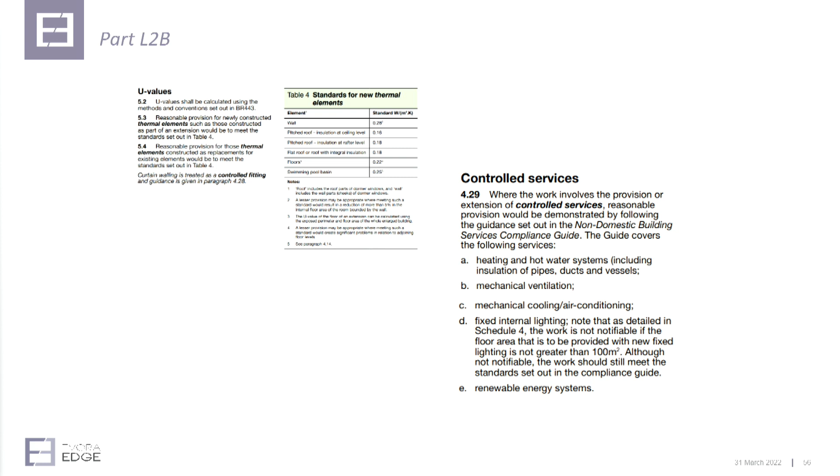So if we're going to change the heating system from a traditional boiler radiator system to an air conditioning heat pump type system, we've got things we've got to comply with in building regulations and demonstrate that we are complying with those. So actually within the commercial sector, I believe the regulation is tighter.

New building development, yes, is regulated, but retrofit on existing properties, you can do what you like in your house. Nobody's really going to come and knock on your door and tell you you've contravened an energy regulation. But in a commercial building, we've got real responsibility to make sure we're installing with energy in mind.

So whilst the dilapidation - our landlord's now got his vacant floor that he's going to do something with. But of course he's got the rest of the building and the rest of the tenants to consider. And if he's going to do something on that floor, he enters into an obligation to start looking at other things.

So it introduces a number of challenges for him, which we have to consider as consultants. How do we interact with the rest of the building infrastructure? Typically it's electrics and fire alarms that come up as the challenging things.

But existing ductwork typically has a life expectancy of 30, 40 years, but you can see ductwork that's been in buildings for a lot longer than that. And the cleanliness of the inside of ductwork - all of a sudden the world's changed, and good quality fresh air is something we all want now. Perhaps it wasn't that high on the agenda a couple of years ago.

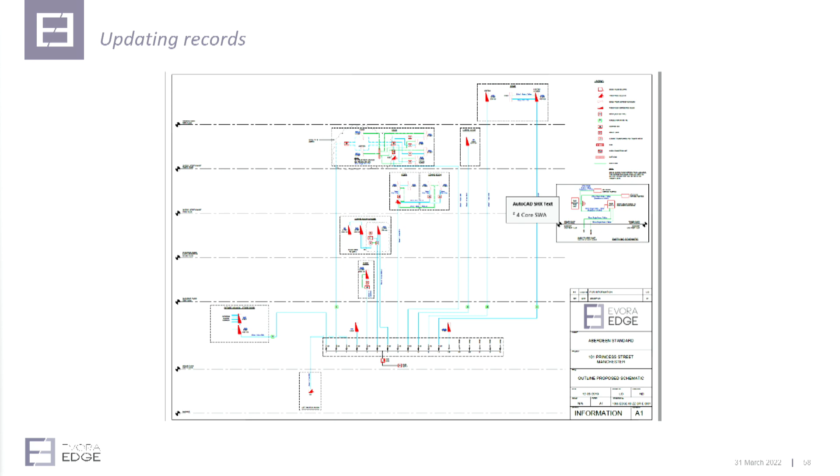So we update the records and all that is part of creating this digital model of the building. We've got the digital twin of the building, but we're creating all the digital information that sits alongside that - the asset register, wiring diagrams, floor plans, details of risers, etc.

So what's driving us along the path to net zero is the MEES regulation, the Minimum Energy Efficiency Standard regulation, and it places obligations on landlords. 1st of April 2023 is interesting - if a non-domestic property is already let, landlords must not continue letting it if it has an EPC rating of F or G, must not continue letting it.

So this is a bit of a step change. You've got your tenant in there already, but the building is rated F and G. You've got to do something about it before 2023. That's an interesting angle, because most of the rest of the regulation is around the point at which you're letting or selling the property, but this is a change. It's actually starting now to impact on buildings that are already let or already got a tenant in there.

So that's a risk. I know of a few buildings that are F rated, but I don't think our portfolio's got very many that we need to worry about being at that level, and we're certainly doing something about them if they're down at that level.

Sorry, just to clarify that statement - what you're saying is in exactly a year's time tomorrow, if you've got a commercial property and it's a D, you've got to say to your tenant... No, an F or a G. Oh sorry, an F or a G. So if it was an F and you've got a tenant in there at the moment, as of a year's time tomorrow, they can't rent that building. They've got to put into place a plan to bring that EPC rating up.

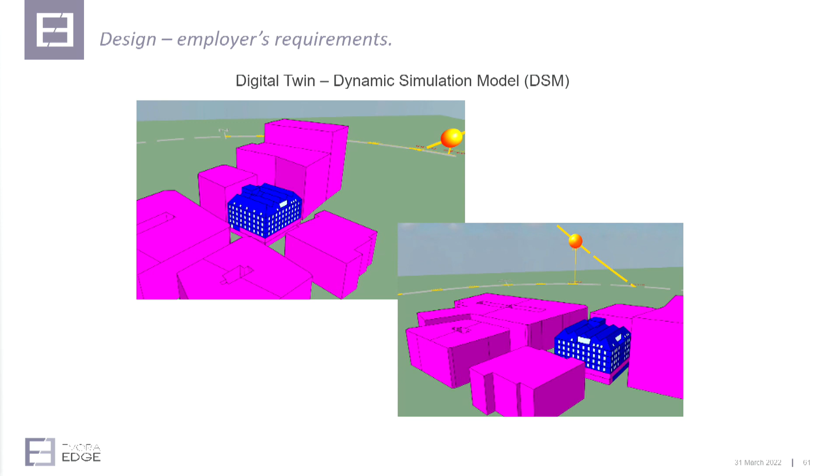So, digital twins - the other reason for creating a dynamic simulation model, this is our building in Manchester that we're talking about, is that in the simplified modelling methodology of a level 3 and a level 4, we can't put the buildings around that building, so we can't consider the shading factor.

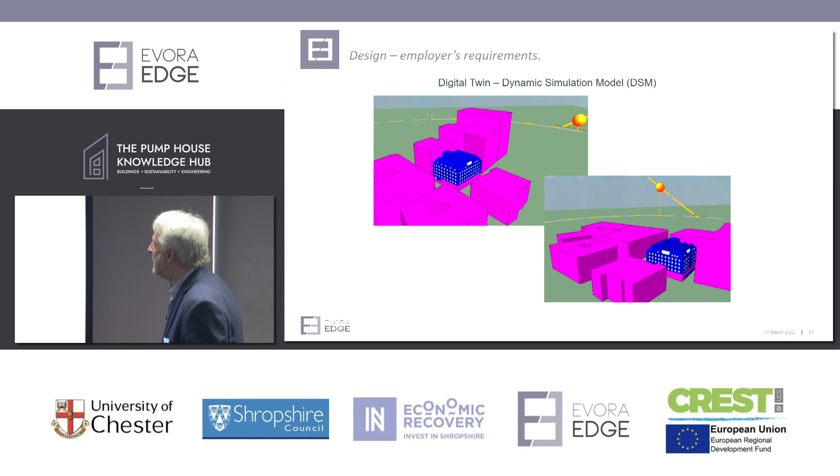So with the dynamic simulation, we create a dynamic simulation model. We can do solar prediction, we can model solar panels on the roof, we can model heat pumps in the building, all kinds of things within that model. We create that digital model, but that's not an easy task to do - it takes us a while and costs a pretty penny.

A pretty penny? Give us a flavour. For something like this building, you'd be paying between £5,000 and £10,000. But there's nothing on this side of it, so surely there's got to be a discount? Oh, shading-wise, yeah, putting the shadings on is easy - those pink buildings go up very quickly. It's the detail of creating this that takes the time.

Does it go to the level of PHPP, insofar as Passive House takes in the trees and the types of trees? We don't go that far - we would put trees in, but we don't go into that level of detail. So that makes a massive difference? Of course it does. Yeah, of course it does.

So on MEES risk - we've come to the conclusion that we're going to take out the gas boilers in this building and put in heat pumps. The type of heat pumps we put into these buildings are variable refrigerant volume, variable refrigerant flow heat pumps.

So they're different to the type of heat pumps going into domestic properties. A domestic property heat pump is air to water - you're using the air to heat the water. A VRF system is typically air to air, but it uses refrigerant gas to move heat around the building, as opposed to water.

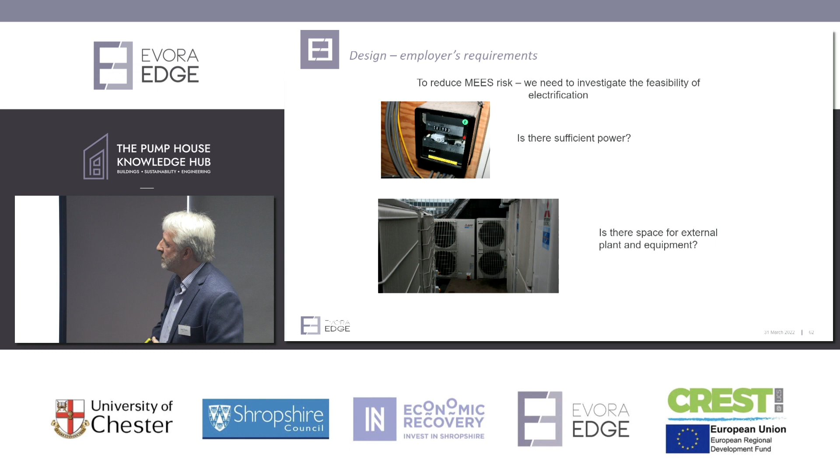That building we looked at is actually a listed building in terms of its facade. The roof was changed and it's a pitched roof. In our original design, working with the fabric consultants and architects, we designed a platform for that roof to house all the condensing units for the future, but it fell down at planning. So we're left with the challenge of where to put our condensing units, because we can't put them on the roof. This picture is a real picture from that building that we were able to rectify.

The tenant that vacated the floor had actually installed all this air conditioning. You can see they're on £30 rubber feet - it's actually plastic, not the big foot that we specify and use. And you're right, vibration becomes more of a factor in this. But they'd packed it so tightly, and this is part of our consultancy - it didn't happen before we got involved, but it's part of our consultancy now.

We would approve any works that the tenant's going to do. But what happened before we got to site was the tenant pitched up and installed their air conditioning units, and these two units were serving somebody else's floor. They'd created so much heat in this area that those two air conditioning units keep tripping out, so that tenant's got a problem. But the new tenants, I'm happy, I'm working, I've got what I want.

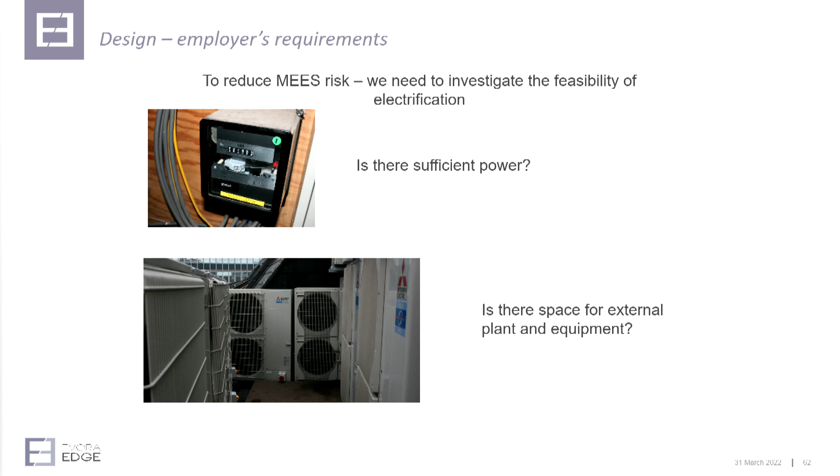So our management of that - what we've been able to do is strip all this back and create a space to put in new air conditioning units. But all that's a factor in how we're looking at managing the building.

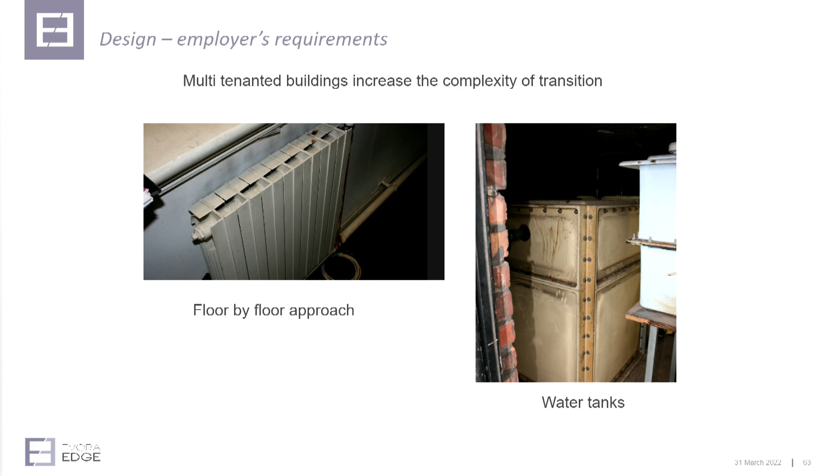So multi-tenancy buildings increase the complexity of transition. This building has got gas-fired boilers and radiators, but we're going to convert one floor to VRF. In fact, the phased approach means we're doing 3 of the floors, and the other 2 are already there. That phased approach means we want to get rid of gas now, so we'll remove it from this floor with these radiators and put VRF in. But that's only a marginal benefit to the energy performance certificate, because other floors are still on gas. So how quickly can we transition the rest of the floors?

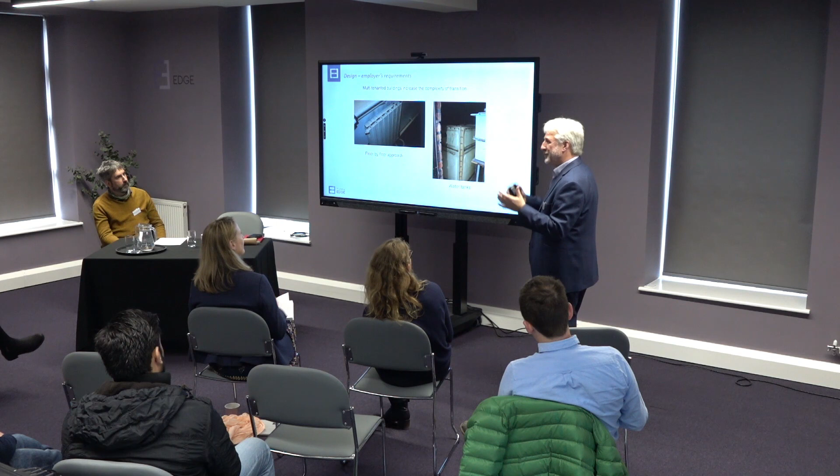We have to look at lease breaks when a tenant's going to come out. Is that a phased plan, or can we do that work whilst tenants are in place? That's a negotiation, and one of the upsides of COVID is everybody now realises they can work from home. There's much more willingness to say to a tenant, if you go out and work from home for 6 weeks, we'll come in, bang bang bang, and then you come back and it's all done. Whereas before, if you put that as a challenge, they'd say no way can we work from home.

Other things - this building, the roof works etc., the water tanks are there, but they're not coming out anytime soon because there's no physical way of getting them out. They're sectional, they will break down, but it gives us real challenges around the transition of the building over time and how things get adapted without any consideration of how they can be maintained and moved along.

So we write what we call employers' requirements, they're specifications, and this details everything that needs to be done on that project. So we're now at the stage where we're specifying what we want. In our world, we pass the ultimate design responsibility to the contractor. So we're giving them guidance on what we want, but it's up to the contractor. They become design and build, and it's their responsibility to take that on.

And there are good reasons for that sat as a consultant, but there are also good reasons for that sat as a contractor as well, and I've worn both hats. So, but we specify things.

So we specify in detail what the lighting scheme is going to be, because that's important to the EPC rating. That's the margins we're going down to now. We're not just saying LED lighting, we're talking about the harmonic distortion, the uniformity, the lux levels in detail, because that's in our model, and that's what we're telling our client. Spend £100,000 on lighting, we're going to move your EPC from here to here. And if we spend £100,000 on lighting and we don't move the EPC from here to here, then we're embarrassed about that. So we're very specific in detail on those sort of things, and regulations and standards.

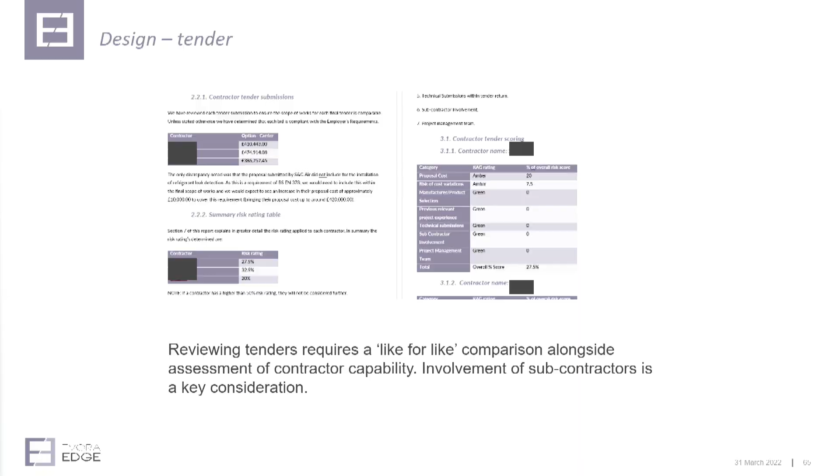On the projects that we deal with, you can see the sort of figures. That's a £400,000 to £500,000 contract. On those sort of figures, there are always going to be a drift on cost of some sort, so we put a provision in. We put a 5 to 10% provision on top of that figure for things that we'll find, because one of the things you have to do on this sort of work is validations beforehand. So there are the unknowns. We've had a look at the electric in the building, but until we start to take ceilings down and stuff, we don't know. So there are unknowns, so variations are going to come into play that will potentially lift the cost of that project.

And of course there is value engineering as well, and the negotiation about value engineering. So as I say, we produce a design intent, an employer's requirement, but a contractor may come along and say, actually we've looked at this, we've got above the ceiling here, we could do this differently. We could put this distribution board in a different place. We could put the air conditioning plant not where you're saying, we could put it over here, and that would save us on pipe work and this, that and the other, and we could bring X amount of savings into the project.

Normally they don't tell us that, they just save it and put it in their back pocket, but when they're looking for the order, the value engineering comes into play, and that's where the benefit is to them of taking design and build, because they can harvest some savings themselves, and we're happy for them to take responsibility of making that change.

So like for like, it's a number of issues, not just price driven. We quite often go to our client and say we've got 3 prices, but this one is higher, yet it's the right price for the job. Because we also benchmark, so we know pounds per square metre how much stuff's going to cost, and we know very quickly if we're out of that sector.

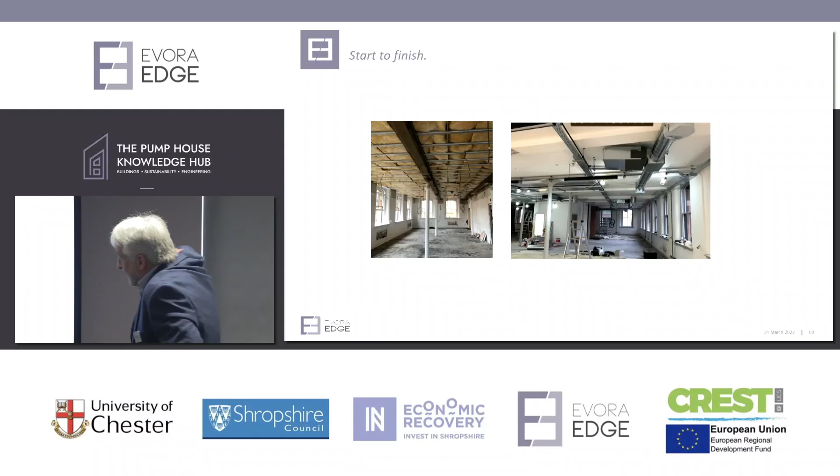So we've done the project, start to finish on this building - radiators out, ceiling out. I'm not 100% sure, because we don't deal with fabric, whether that's insulation going in or coming out, but it is a factor, and this is an interesting discussion we were having.

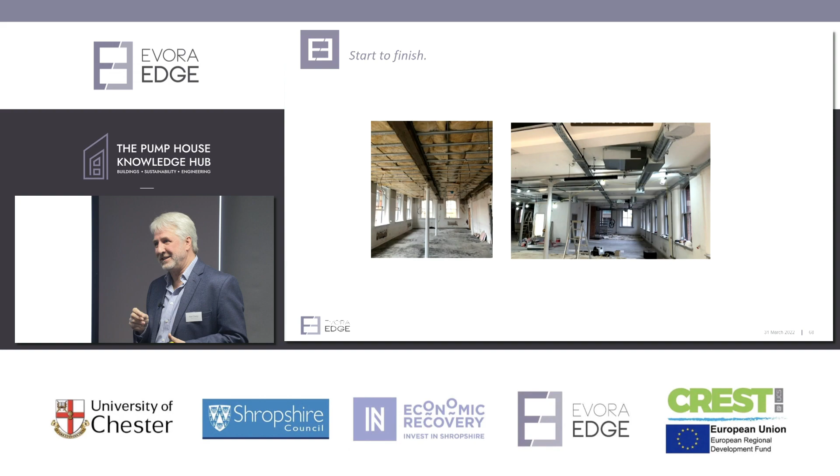Who with? I don't know who with.

On heat metering, billing and networking - if a tenant comes in and insulates that floor, the tenant above is going to get an increased heating bill, because we've now stopped passing heat to him. One of the things regulations on heat metering network billing is introducing is the requirement to bill tenants on their heat as they use it. Traditionally we've got separate metering in this building, so we get our own bills for what we consume, but in a large building it's done on a pounds per square metre basis - everything's lumped together and you pay on a proportional basis against what you've used. But the regulation coming into play now is demanding that every demise space is separately metered and heated.

So a tenant, as I say, may get a shock if there's a fit out done and all of a sudden the floor's insulated and his bill's going up.

We're installing here exposed fan coil units with ducted distribution, all the rage. This is an old print works, so it actually fits the environment. Not my favourite thing as an engineer, because I don't like to see ductwork and cable tray and stuff, but other people do, all well and good.

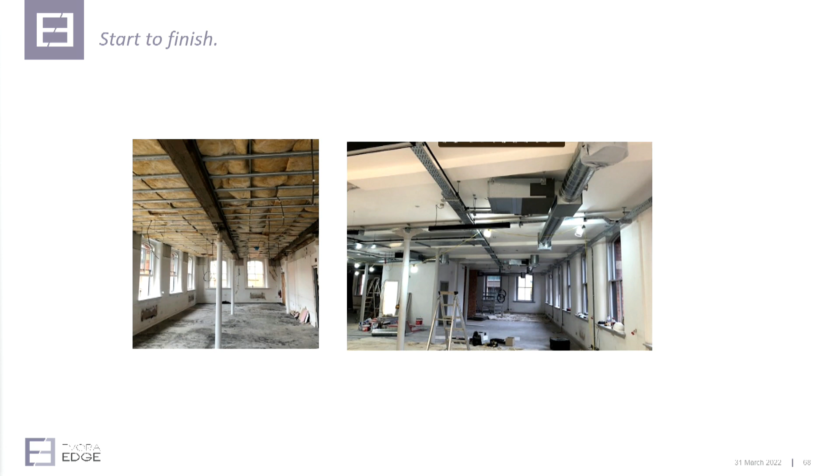So we move the project along, and we go along and check that the work's being carried out to the requirements and specification, and we get to this stage. This is a Cat A plus that I mentioned. The landlord has gone one stage further than just fitting out and getting ready for tenant. He's fitted out with all the fixtures and fittings in there, so it's turnkey. We've put the

Data and fibre into the building as well, so everything's there. You can come and plug and play. Come and sit at your desk tomorrow and start working.

And that's an attractive proposition. I suppose we've been in a recession, a COVID-induced recession, and a lot of companies went out of business. There are a lot of people starting up fresh, and those people don't necessarily want to commit to a 5-year lease, but they do want office space, and they want it ready. So they'd rather pay an extra £1 per metre squared for instant space than getting it and having to fit it out themselves, and be ready to go. It's flexibility - they can move in and out of that space.

What we're also creating now in office spaces, as you can see here, is these collaboration areas, pretty much like we've got here, because I think the office market is changing. People will come into offices to work, but they won't be coming in to sit at a desk. Obviously there are some jobs that will require people to sit at desks, call centres etc.

But most people will come into an office to meet with other people and collaborate. But if they want to write a report, do something, I think people will sit at home and do that now. I think there's a change in the way people work, and it's actually the reality of the way that people at director level have embraced that flexibility.

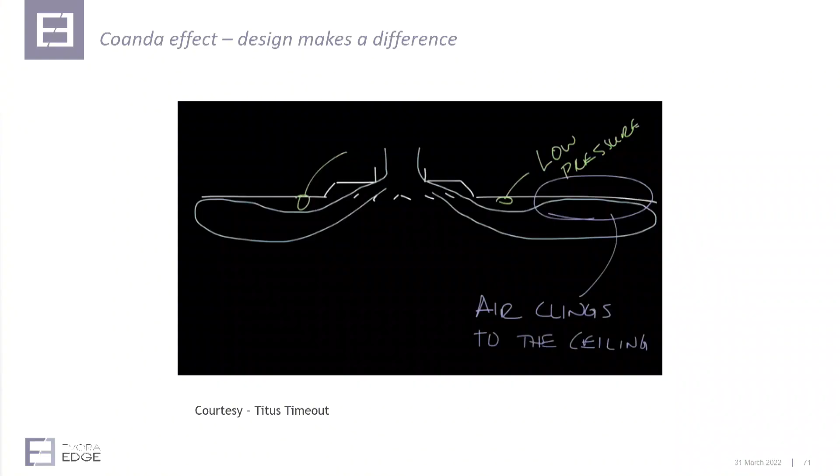Now it's very fashionable not to have a ceiling in place, but the benefit of having a ceiling is that air is induced across it. So when the air discharges out the grill, it's induced across the ceiling, and then it drops in a uniform pattern around the space. If you don't have a ceiling, the air drops straight down. So where you've got an open plan office with an exposed ceiling, fan coil units, and grills above people's desks, they complain of drafts because the air's dropping on their heads.

So by putting a Coanda plate in, we're replicating, inducing that airflow, that ceiling system of moving the air and spreading the airflow pattern.

Designing airflow patterns in buildings to reduce drafts is something we have always done traditionally as consultants. But the reality of the modern world, of modern design, is people want the look and feel of the space before the operational elements. So we are compromising in what we do, and that's why I don't like exposed ductwork, because it's a compromise on making people comfortable. And if people aren't comfortable, they don't work well.

This is a transition in my career, because I was a contractor, and when I was a contractor, consultants were the bane of your life, they didn't know what they're on about, and they don't know what they're doing. But now, with the other hat on, there's little nuances as a consultant that you bring to the equation. So that's the end of my talk.

Did I run to time? Yes, well done. We do have about 10 minutes now for questions, and we've actually got a couple of questions from online, so we'll start with those.